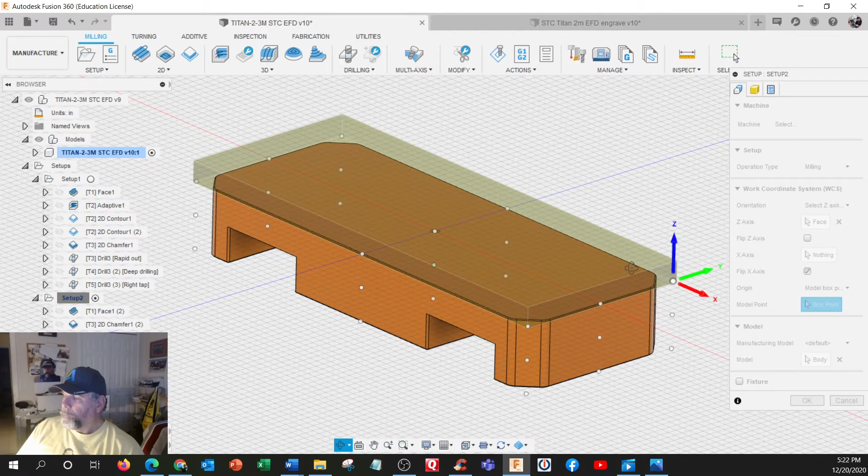We got the XYZ in the model box point corner up here. So model box, these are all the box points that line up with the model. Even though it's missing the corner, this surface and this surface are how we're going to align it on the second side, and we have to control the total height of this part. So we're going to base that on where the bottom sits on the machine. In the end, we're going to machine everything off until we get to this coordinate.

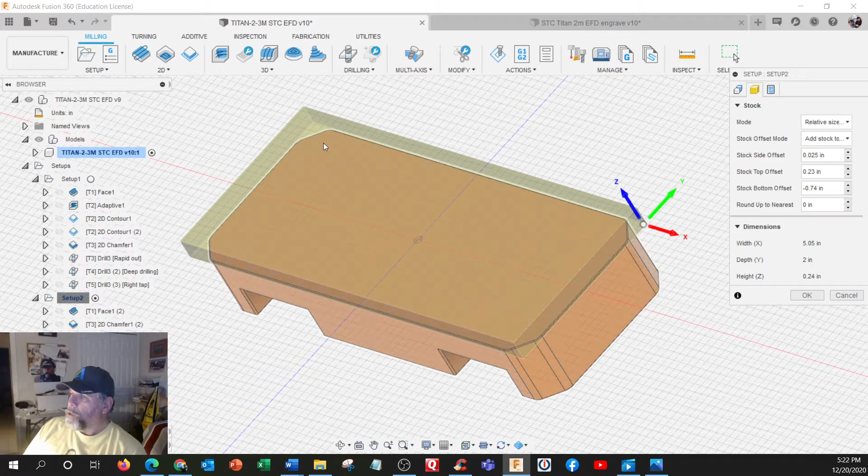And the setup on the stock, we want to make everything add up to 2 inches on the outside. So we use the same settings, and if you didn't know what to set it to, go to setup 1 and look at the stock setup. We got 25 thousandths on the X and Y offset relative size. This says add stock to all sides, and the Z negative was 230.

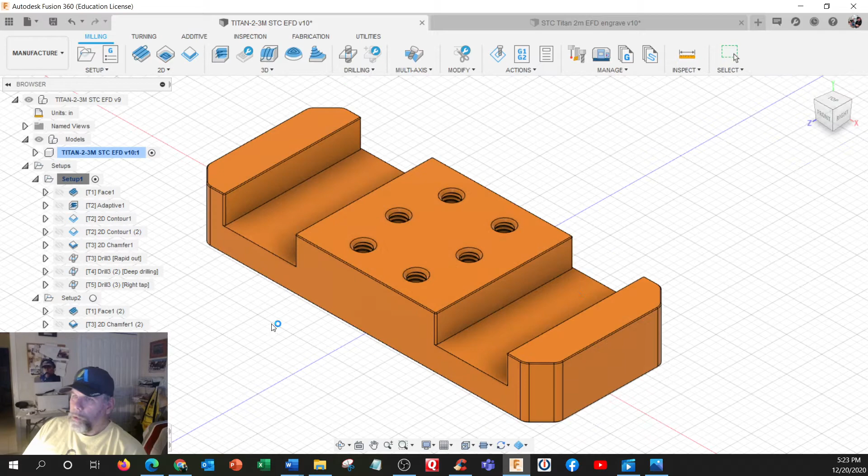So we're going to go to setup 2. This one says we'll add stock to all sides, and we'll do the same thing. We'll put 50, and 50, 0.50 and 50. That ends up being 2.05 - oh, I think these are 25s. Yes, that's 2 inches, and the bottom is now on the top.

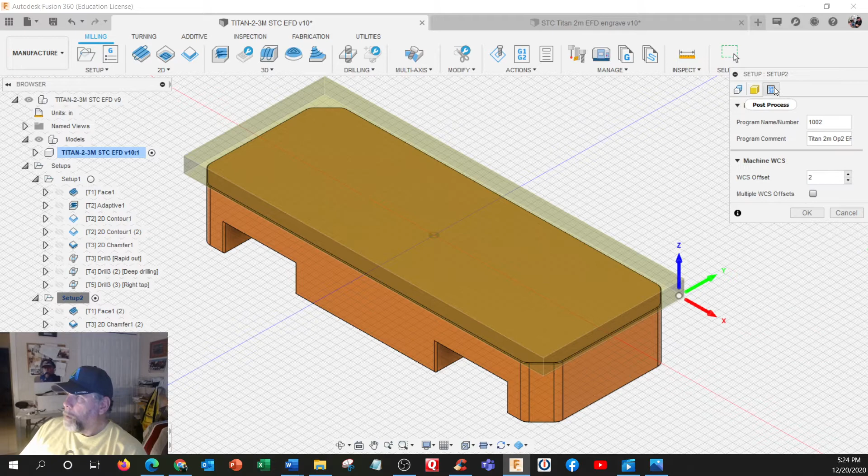So we're going to make the top 0.23, and we're going to shift the bottom by negative 0.74. There we go. And we make sure we name the program number and name up here, and we're using WCS number 2, which equals G55 in G code.

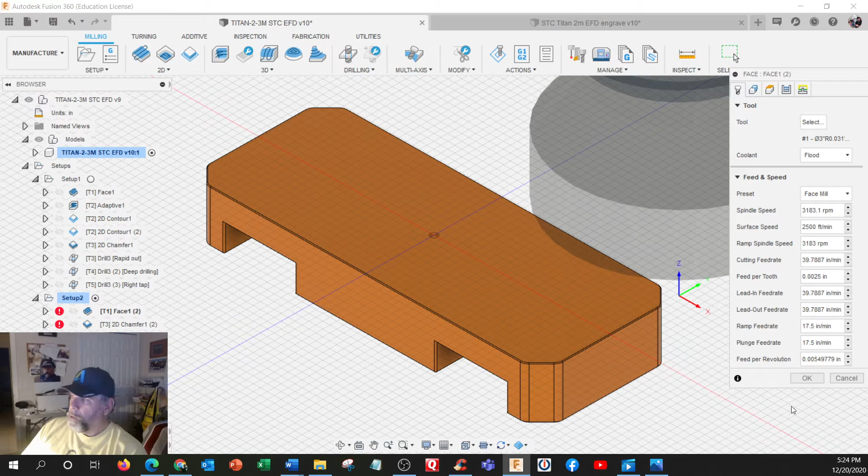Alright, so anytime you make a setup change, it wants you to update. So let's just review it anyway. So we duplicated this operation, brought it down here, which will have all our feed and speed data. We've identified the stock, that's why the yellow box is there. We don't need to select anything at the moment. And we're going to make all these stock top on operation 2 and just on the face mill.

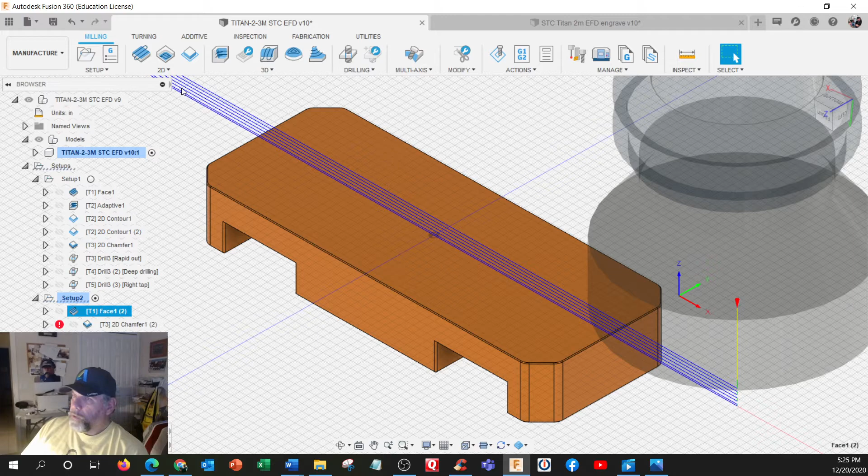Passes, we're going to use multiple depths, make sure that's turned on so we can cut our way down. And we're going to use a finishing step of 0.02. We're going both ways, and we're going to do extend before retract. And that'll give us this - it's going to go back and forth, and every time it gets to the extension, it's going to drop down.

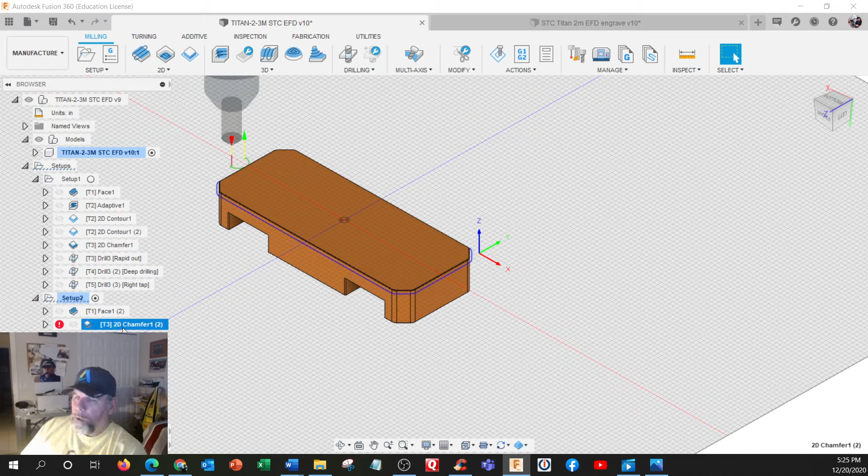The chamfer mill, which we also duplicated and brought down here, so if we did duplicate and we just move that down to here, make sure they're in the correct operations and in order. Then actually you'll have all the correct tool numbers if you've already reordered it from that side. So this one would have all the feeds and speeds from operation 1, and we have to reselect the geometry.

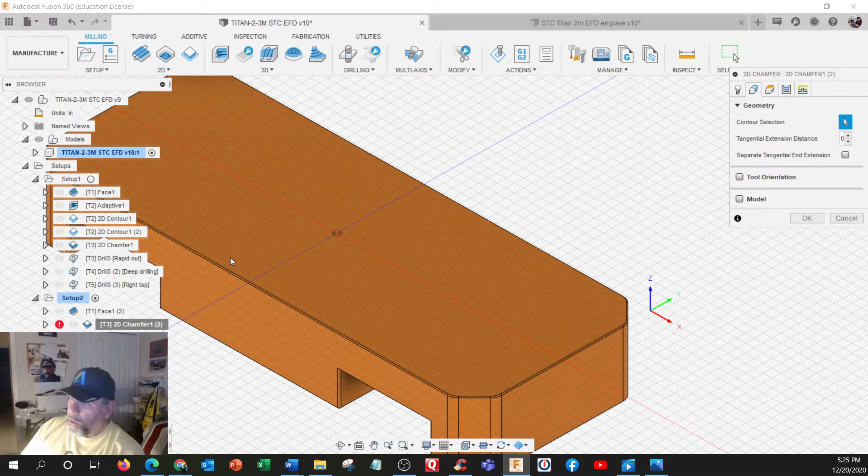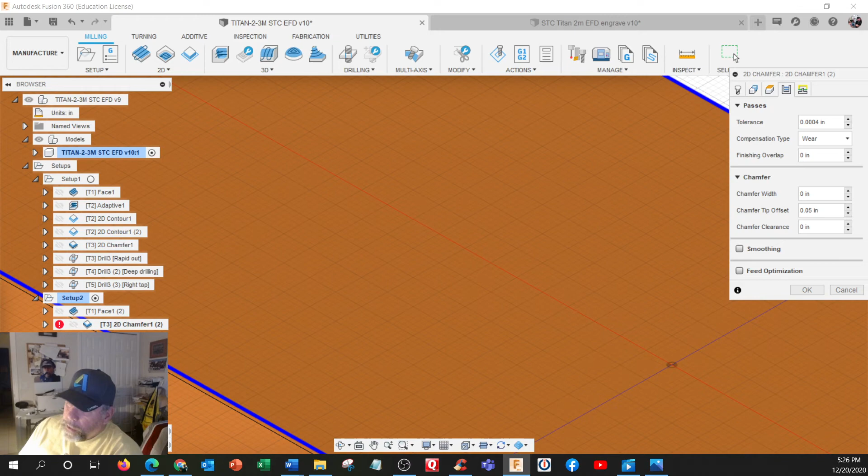So you got to disconnect this if it's on the bottom and select this line right there. And it has the arrow on the outside, so that means it's going to cut from the outside. And we use model top everywhere now because we've removed all that material. And if you select the inside line here, we leave the chamfer width at 0 so it doesn't overcut.

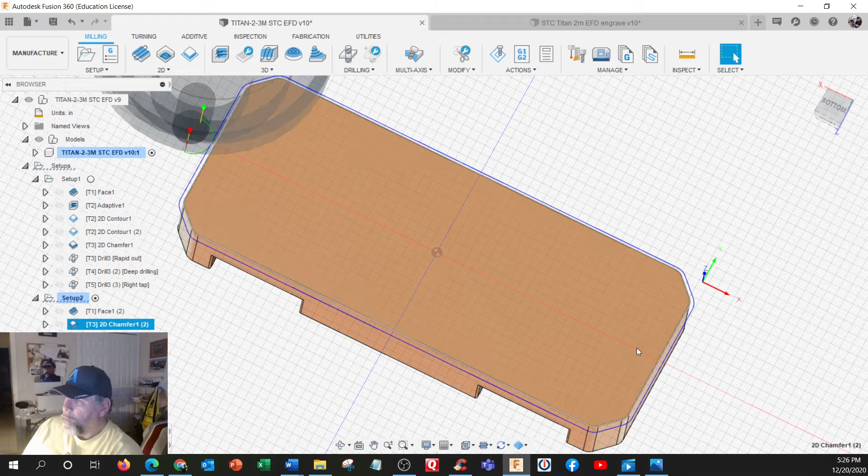Use wear compensation, and I would accept all these settings. So that'll regenerate, and this is what they call a lead in. It's curving its way in and coming around, and then it curves off.

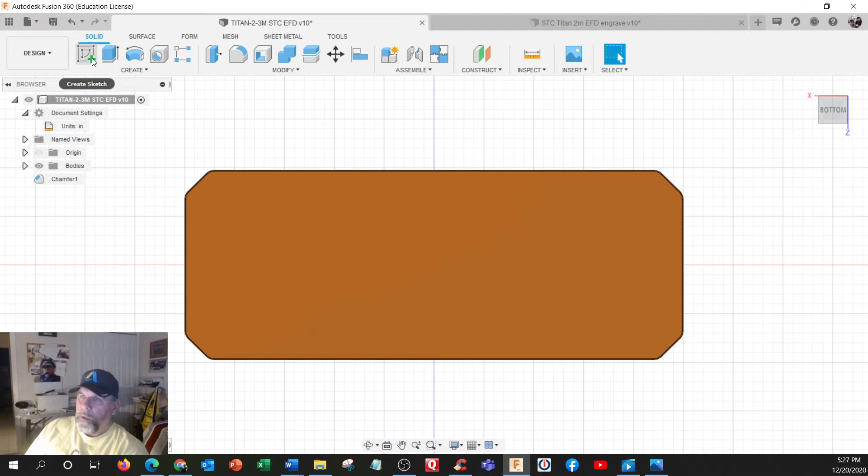Alright, so now we're going to add text, which means we have to go back to design. We're going to use very simple text, and we're going to sketch it. So right now, if bottom is facing up with the name bottom, so I got to create a sketch, and I have to create the sketch on this surface right here. So I'm going to just click the surface, and for some reason it likes flipping upside down on me sometimes, so I'm just going to rotate this around so my orientation is correct.

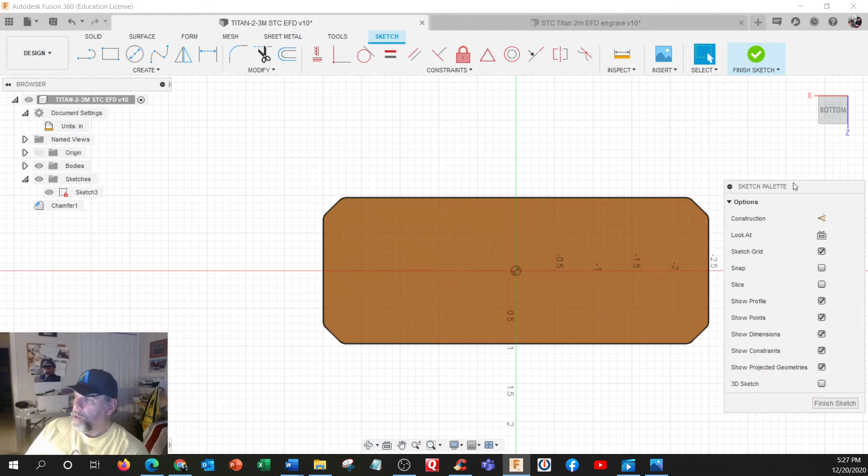It says sketch palette, so we're actually going to just put that over here, and we're going to create text right up here. Alright, so you got a choice of A or text on path. So we're going to use plain old text. It's going to make a window, so we're going to go upper left and then drag this out and put a window right about there.

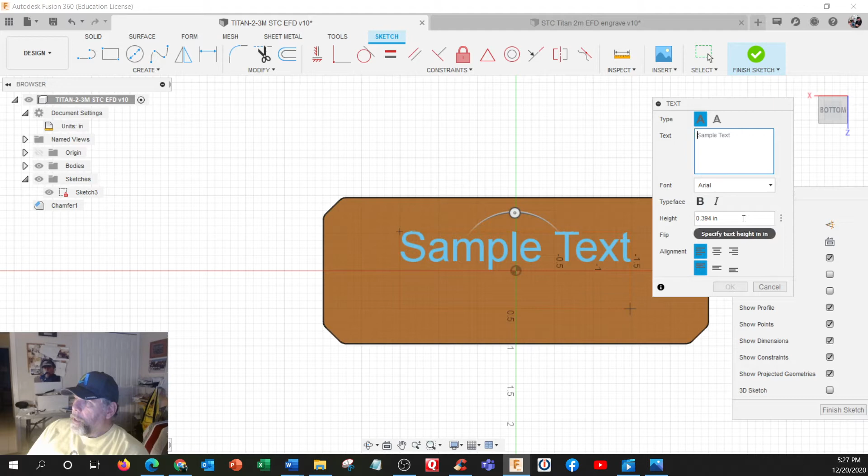So it pops in a sample already. It gives you a height. And the first thing I do is I adjust the height. I'm going to make it smaller. Then I'm going to change it to a simple text, and the ones with the SHXs, and these are the only ones you want to use.

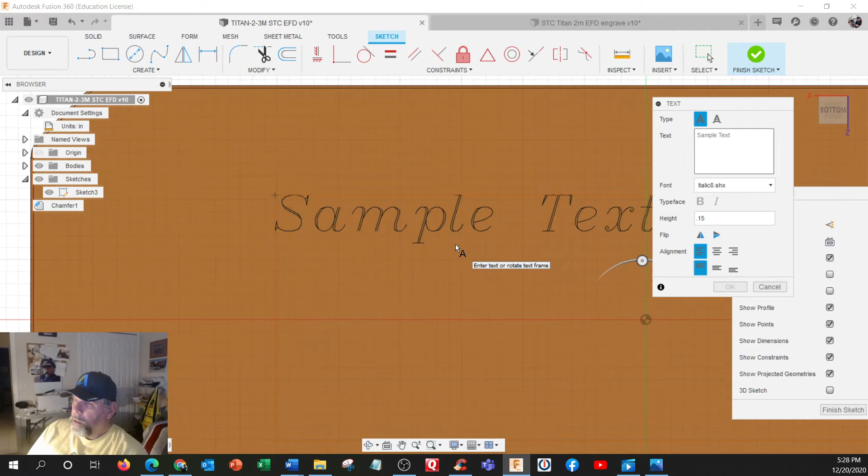Like I've used italic, simple lines, but I'm going to use, the one I like using is Simplex 8. It's nice and simple. And I like this to be centered, so I'm going to use center alignment and center alignment. So it puts it in the middle pretty good.

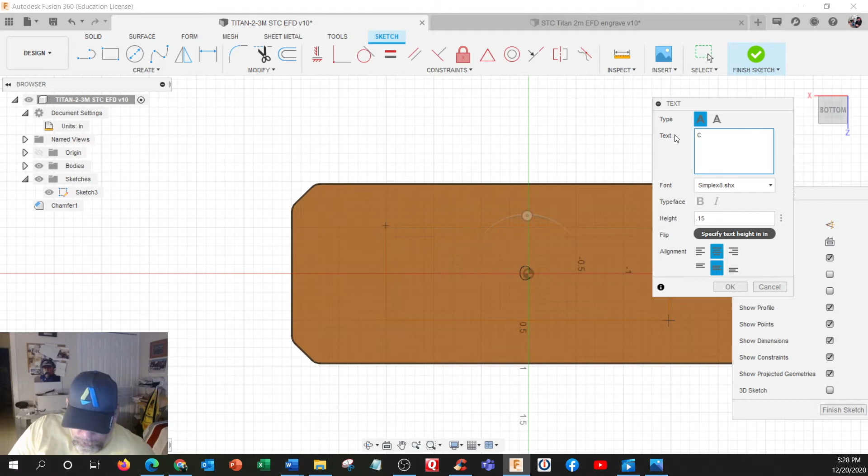And then up here I'm going to type in what I want it to say. So if I put CNC dude, and on the next line I put like Titan 2M. Maybe I want a little space in between like that. I think that looks pretty good. Or if I want to make them bigger, like that. Okay, okay.

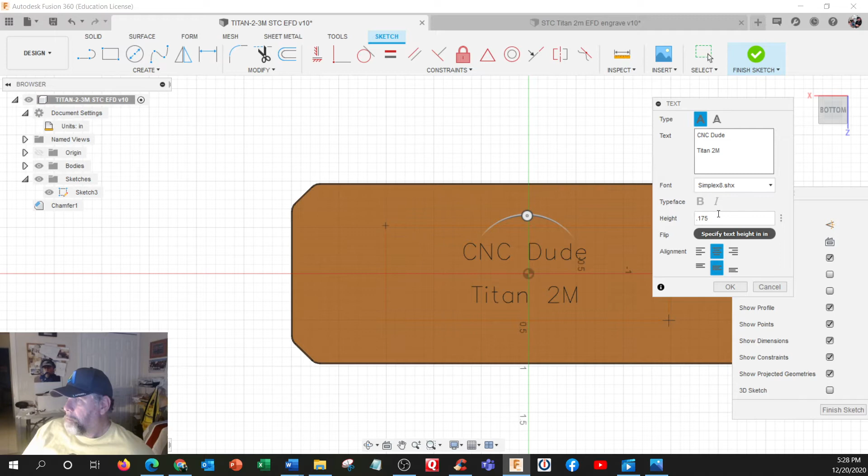I'm going to finish the sketch. Now this is just a sketch, it's not cut into that. We're just going to use this to steer our tool.

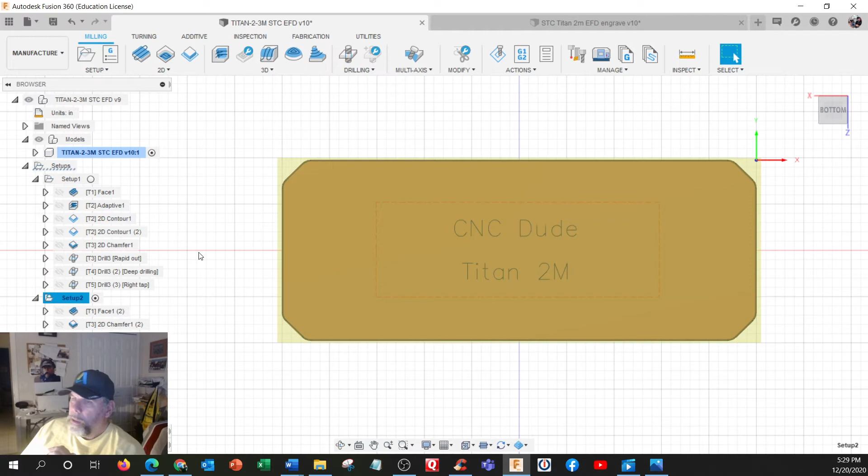Alright, so now I'm going to go back to manufacture, and bottom is still facing me. So I'm going to click on setup 2. And now I got to add in, you have selections here of engrave and trace. We're not going to use engrave, we're going to use trace, which means we're going to just follow the lines. Hit trace.

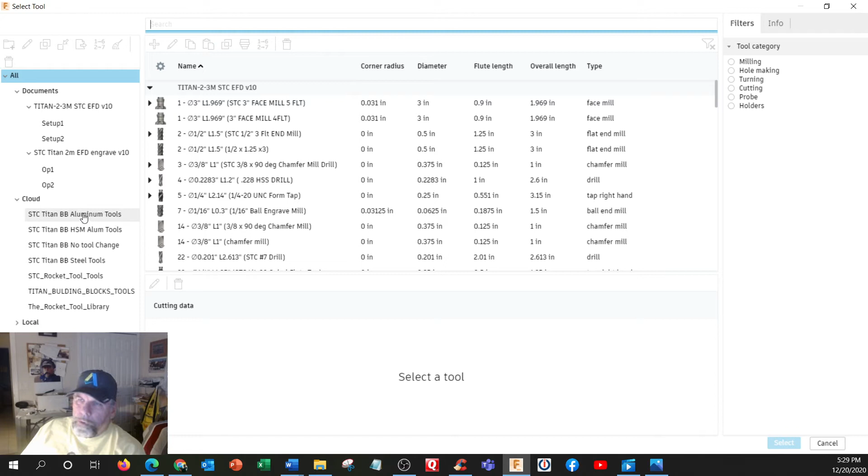Now we got to go select a tool. In the new tool library, the building block aluminum tools, I'm going to pick milling, and we want this one right here, the 1/16 ball engrave mill. I'm going to select that one, hit select, and I forgot to select the preset, so I'm going to get that done now. Engrave, this is all 6,000 RPM at 20 inches a minute.

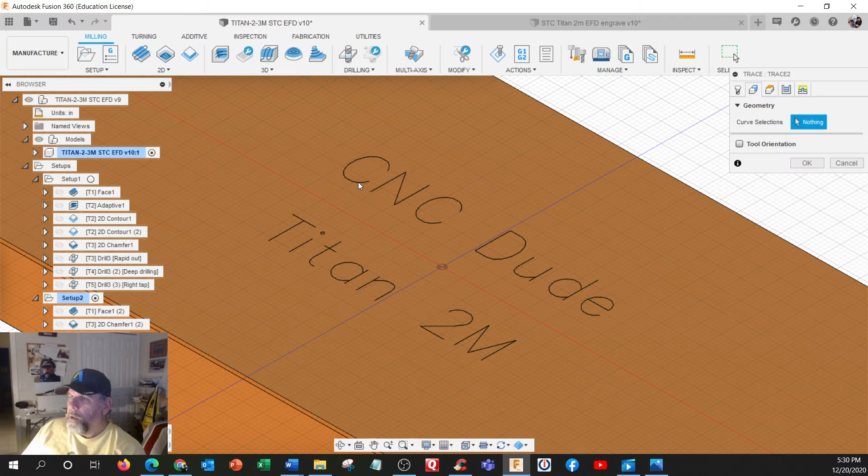Now we have to select something, so we're going to zoom in, and I'm just going to click right there. Notice they're all selected. So now I got to set my heights. I'm going to make all these model top, and model top. The only thing we're missing is the top selection. That's not in this here, that's going to be in this center right here.

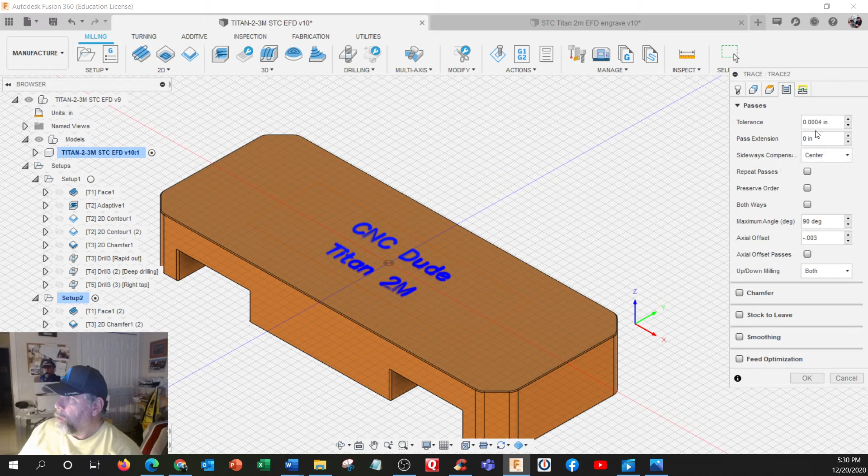And we're not going to do sideways compensation, we're going to stay right on center. And right here is going to be your depth, it's going to be related to whatever surface that's on. So I like using -0.003. And no other settings, no pass extension, and no lead in, lead out. So I'm just going to hit OK.

And there we go, this is actually the tool path for the text. The yellow lines represent the rapid moves in between. Alright, let's do a quick simulation.

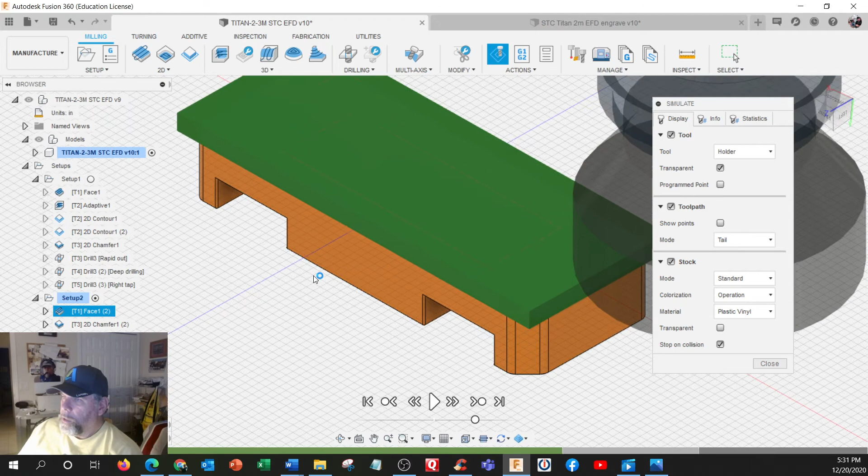Simulate, we recenter this, alright, hit play. I got the transparent tool on. I like using the tail now, that's where it came from. And we're chopping our way down to 0. Eventually it will be aligned with the model right there.

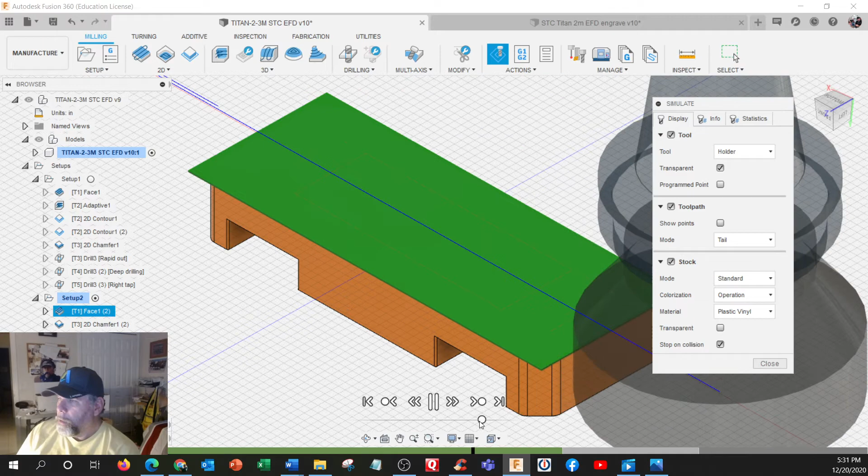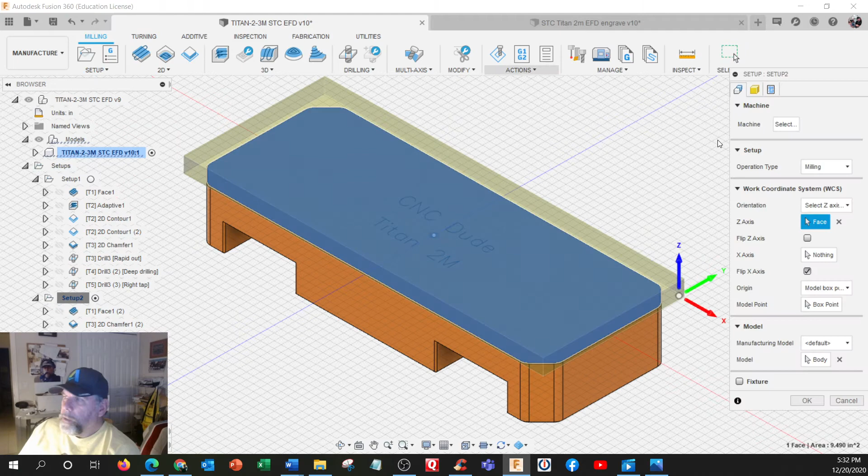And I'm going to chamfer the outside and engrave. Now sometimes I like to, if I actually want to get a little bit better simulation, I could go and edit the stock, the material, and I would make this, instead of minus 750, I would make it minus 0.740. Hit OK.

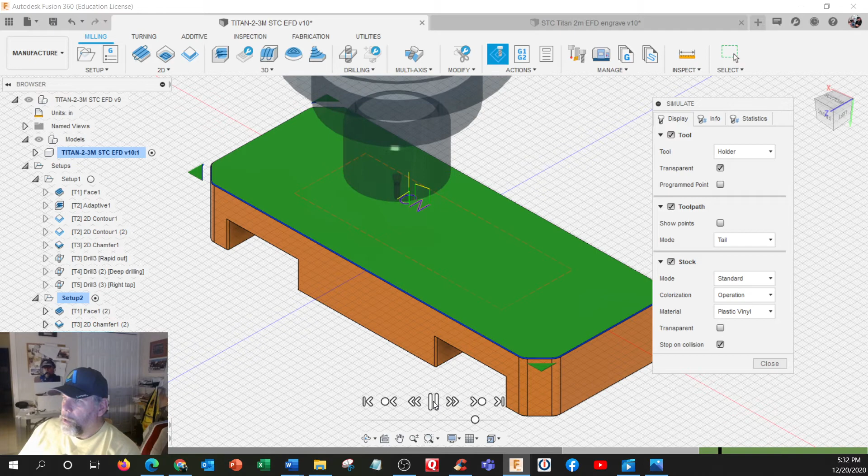And regenerate, and then resimulate. I'm going to jump ahead with operation 1, operation 2, and this leaves a little bit of a skin just for simulation, and I can actually do an engrave like that. So this kind of be a little bit how it's going to look.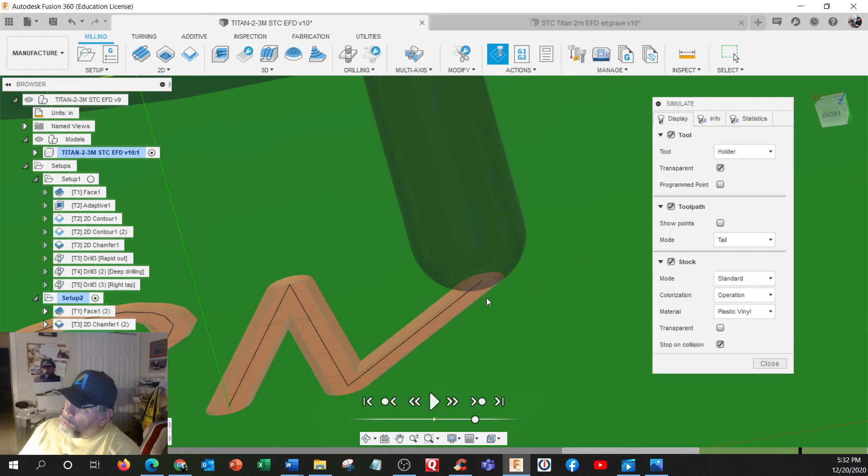So if we look at this, it's actually a spherical ball end mill, and we're just using the tip of it, so it's got a little bit of a curve, it's not a sharp corner. Then you get into things called engraving tools, which have a much finer tip. But actually, this is 0.062 across, but we're probably only using not even half of that diameter right there.

All right, let me unzoom this again and play. So you don't need much depth on these. Okay, hit close.

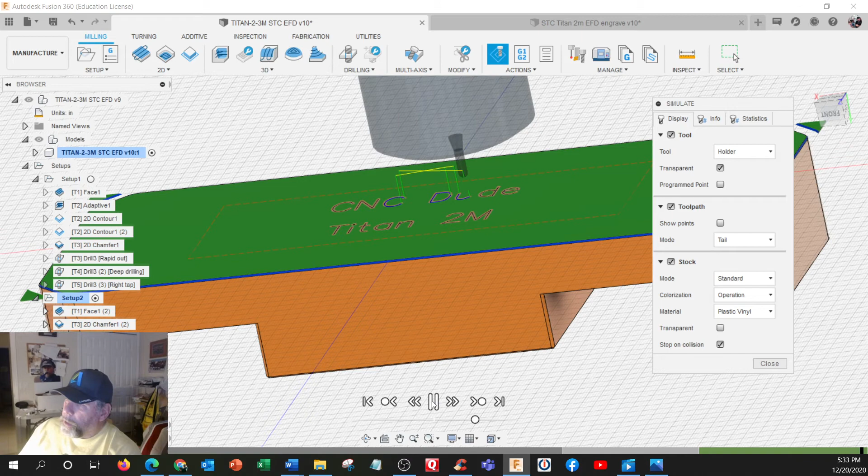All right, let me flip this back over to operation 2. We're ready to make some G-code here. I got everything set up. I got my name up here, I got my machine, I'm going to post, I'm going to save it on my USB. And if there's something already on the USB, I'm just going to overwrite that one. And I'm going to review the code.

Now we got tool 1, tool 3, so these are from the first operation. And we got a tool 20. So one of our machines only holds 10 tools, and the other one does have 20 tools, but the probe is usually in that selection there. We don't want to take the probe out. So we can either, one, you can edit the code at the machine, like here, change the T20 and the H, and there's no D's involved.

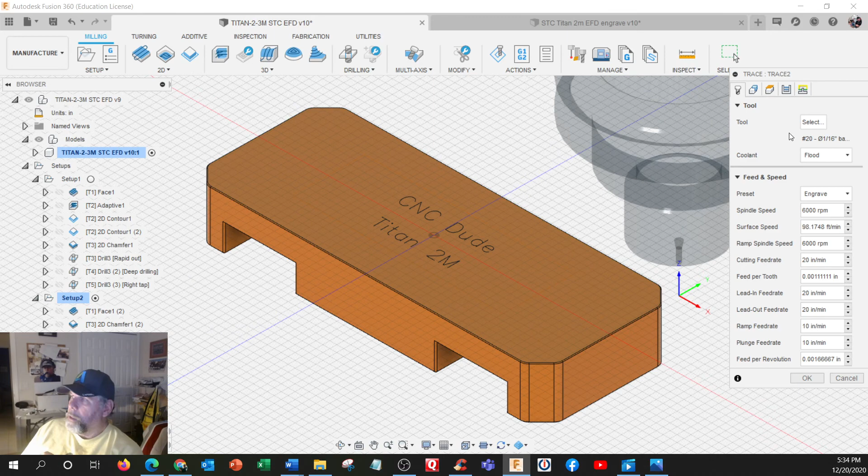That would be one way of doing it. Another way would be to go in and edit, I think I saw it right there, edit the tool, brings you right to the tool library. You go to the post processor, and we're going to name it, let's see, we'll name it tool 8. We never use tool 8. And that one, that would fix it also.

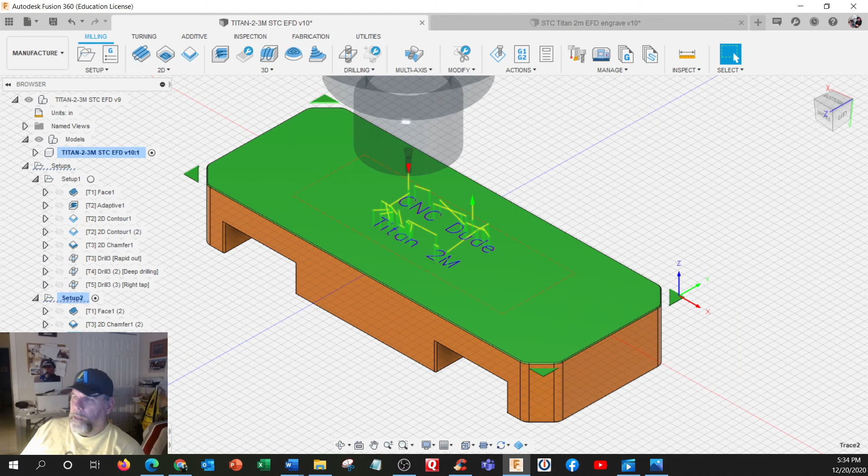So now we have 1, 3, and 8. We just got to remember to set it up that way. So we repost this again, we don't have to edit anything. The whole goal with this is we don't want to have to edit any code. Notice it says tool 8 only.

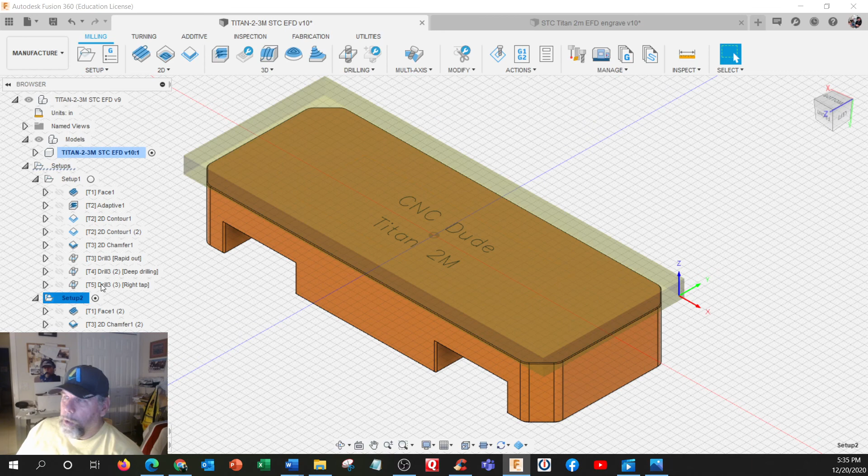So I made a mistake because I only have this one highlighted, I need to have setup 2 highlighted. So I'm going to G-code again. Overwrite the bad one and save the good one. Alright, now I got tool 1, 3, and 8.

And right here also I have G55, which is going to be the second vise. And notice right here, if this is just face milling, so it's just a quick G-code lesson. It's going to start at 1.23 above 0. It's going to rapid to 0.33, and then it's going to feed to 0.22 and go to X minus 6.8. And then the Z level is going to keep on changing, it's going to go left, right, left, right. So 140, 100, 60, 20, and 0, that would be the last cut.

And then the rest of it will, this is the chamfering tool, and this is the engraving, which is a lot more G1s involved there. Okay, that's about it as far as making that part.

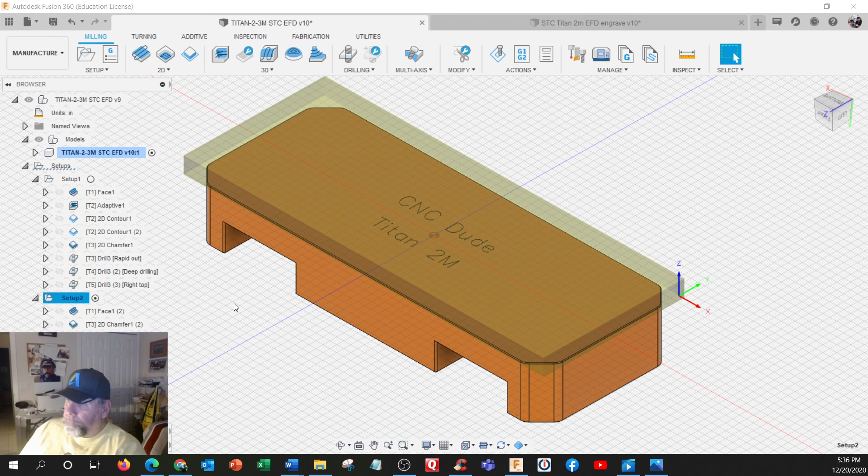So now we can start engraving our names on the back, or we can get into some designs later. But this is a good start, okay? Thanks, talk to you later.